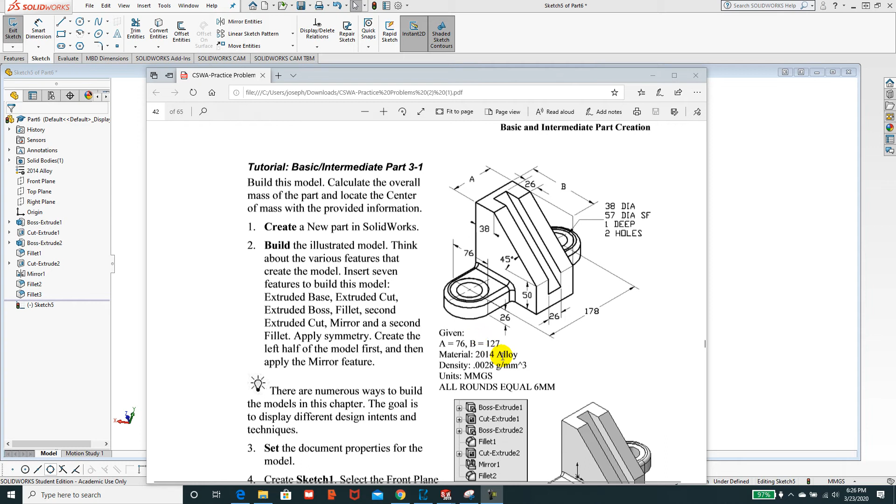If we take a look at it, we'll notice that it's a metric drawing in millimeters. The part is 178 millimeters by whatever this A and B value are. If we looked them up, 76 millimeters and 127. And essentially what they're going to make this out of is 2014, which is an aluminum alloy.

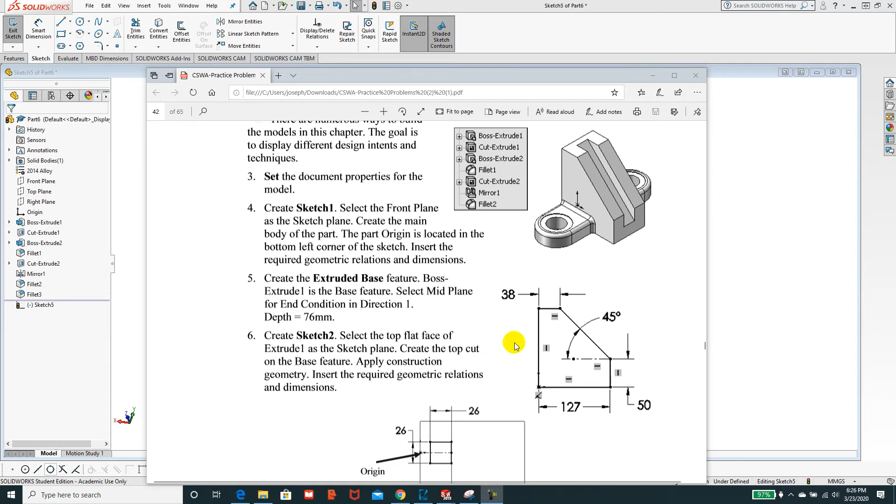When they lay out how to do this problem for us, they tell us that the origin is going to be right in the middle of the part in the back corner there. We can start off by drawing this geometry here on the right plane and then extruding this a distance of 76 millimeters.

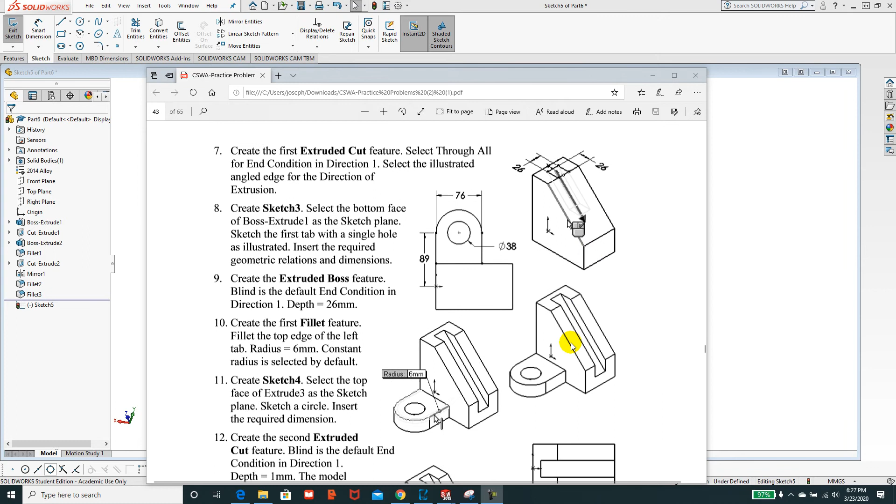After we've extruded that, we'll sketch on this top plane this little square, and then we'll extrude cut that. After that, we'll put these little dog ears on the bottom here with these geometries and with the fillets. So let's get started.

File, new, part. Plain white.

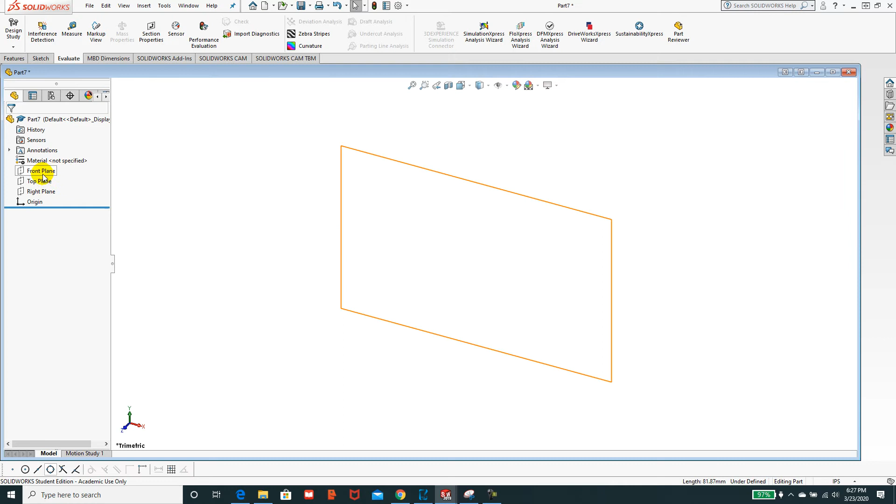Right plane, start sketch. And we're going to make that sketch just like that: 127, 50, 45, 38. They don't give us the height here because it kind of trigs it up there.

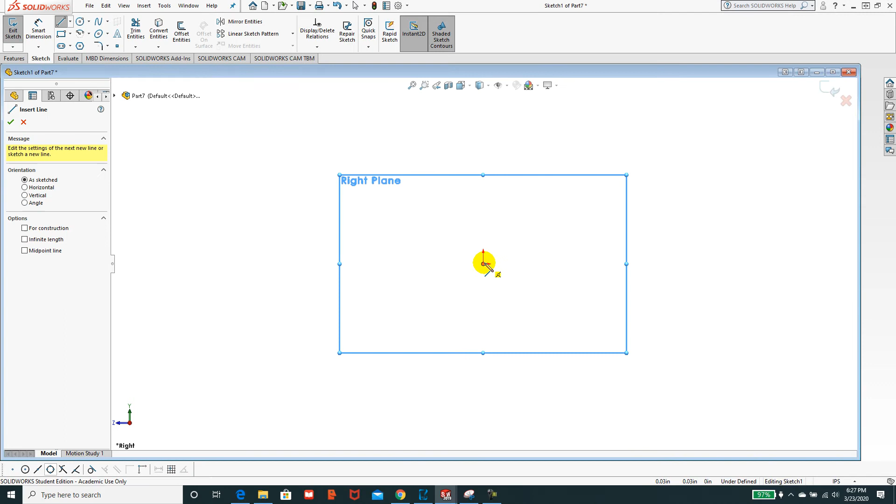So let's set the units, millimeters, and then we'll sketch on the right plane. There we go.

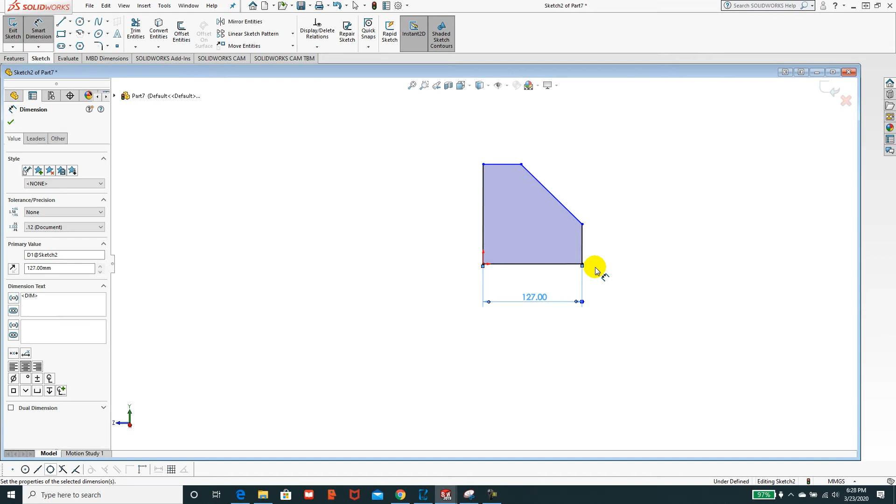127. 38. Get a construction line. Escape. Smart dimension. 45.

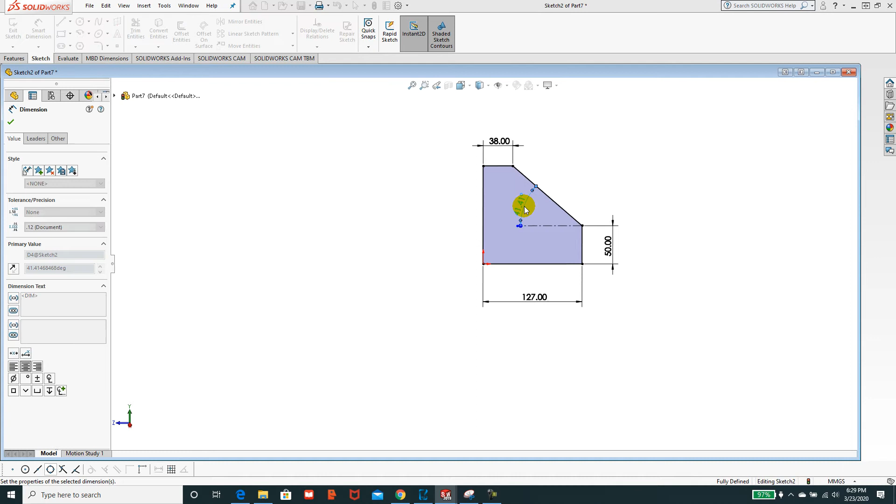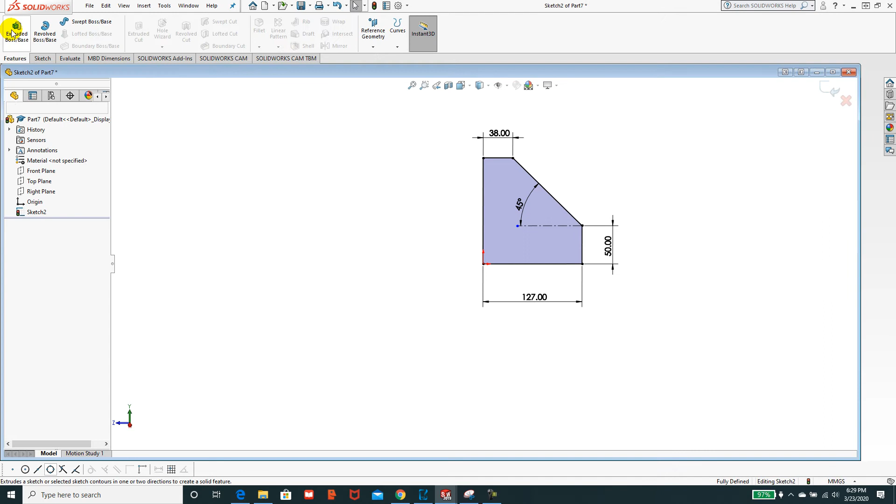Now we're going to take this and extrude it mid-plane, a distance of 76. Features, extrude boss base, mid-plane, 76. Green check mark.

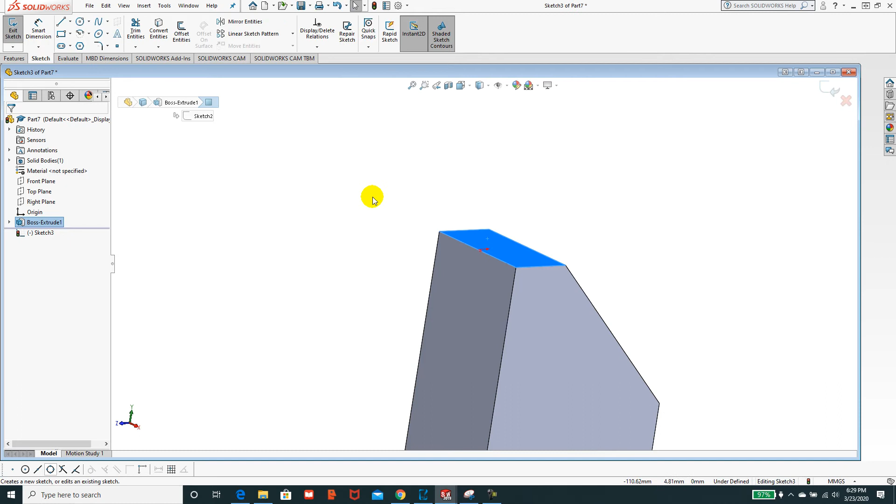I'm going to sketch on top of it here. Spacebar, normal to, sketch, center line. We're just going to make a square, and so we're going to go in here.

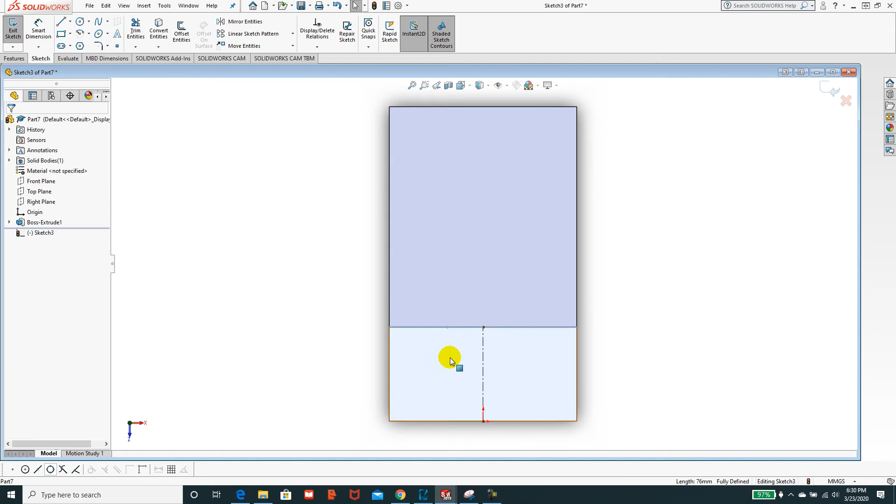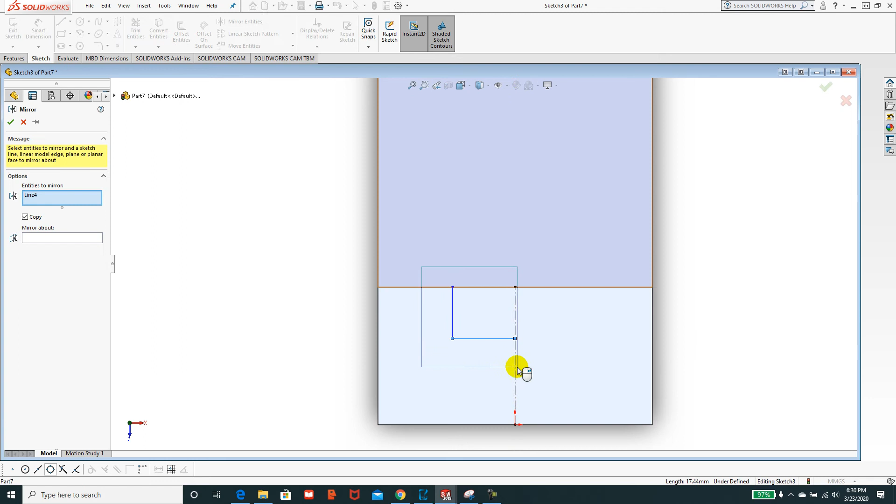We're going to mirror that. I'm going to close that off. And then we're going to dimension that: 26 millimeters by 26 millimeters. This is the sloping edge.

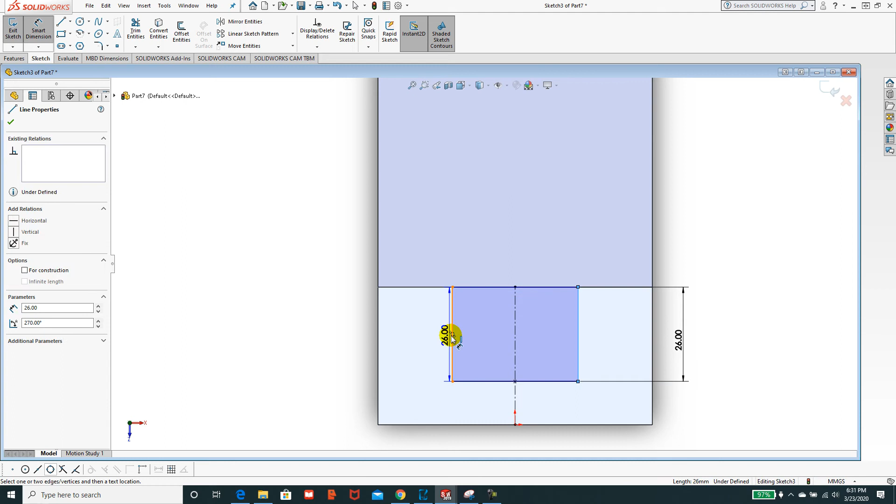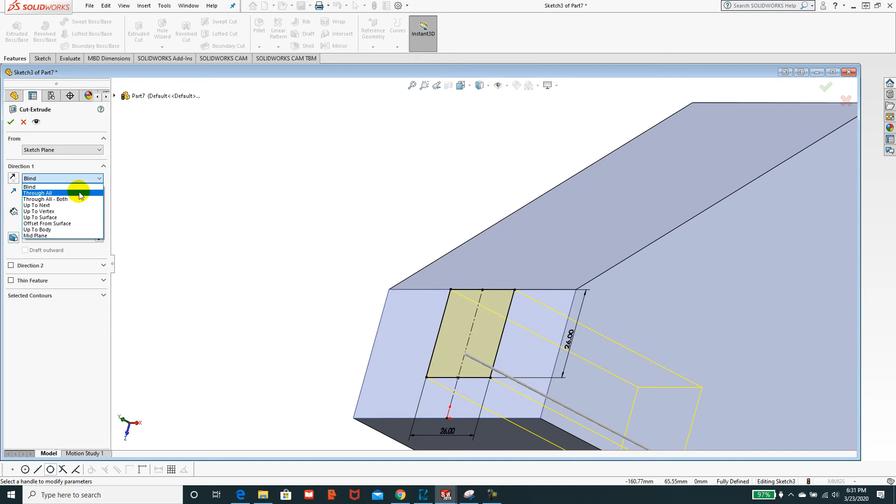Okay, now that we've created that sketch, we're going to go Features, Extrude Cut, and extrude cut that through all. We're going to click in this blue box. It's a direction vector. We'll take it just like that. Took the wrong one, let's try that again. The edge of it. There we go.

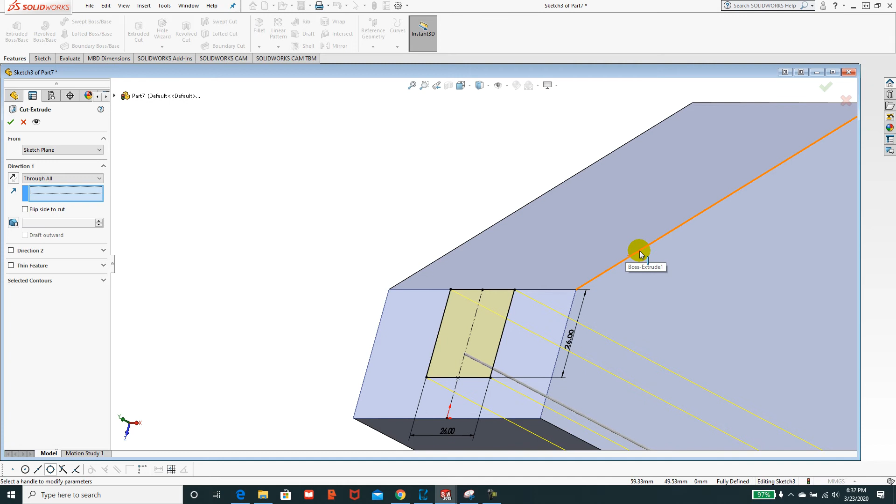Alright, so now we've got the major work done. Now we're going to go and do the ears, these kind of geometries like that, and it's going to be drawn on the bottom of the part. Select the bottom face and basically sketch this shape out, 76 by 89.

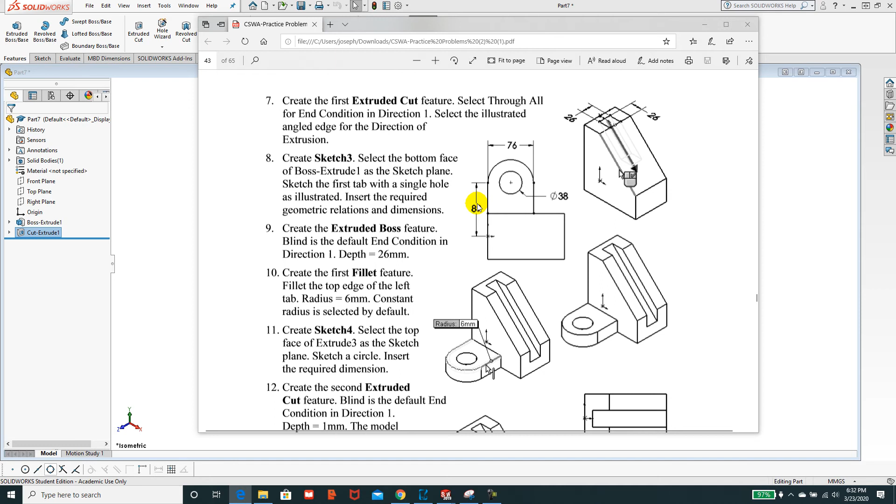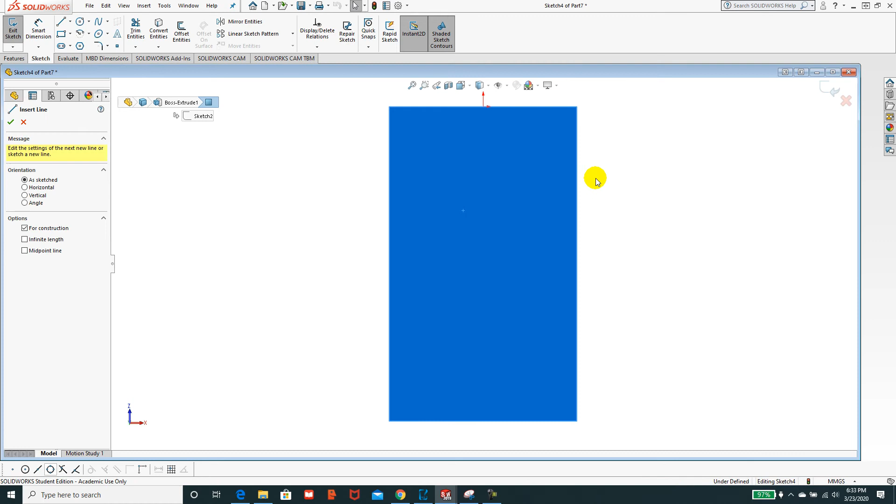Start sketch, spacebar, normal to, and then with the way this one is set up, I'm going to draw a center line. I'm just going to put it out here like this, and then make that half of 76, which would be 38 from this edge. That way I can kind of find the center of that arc.

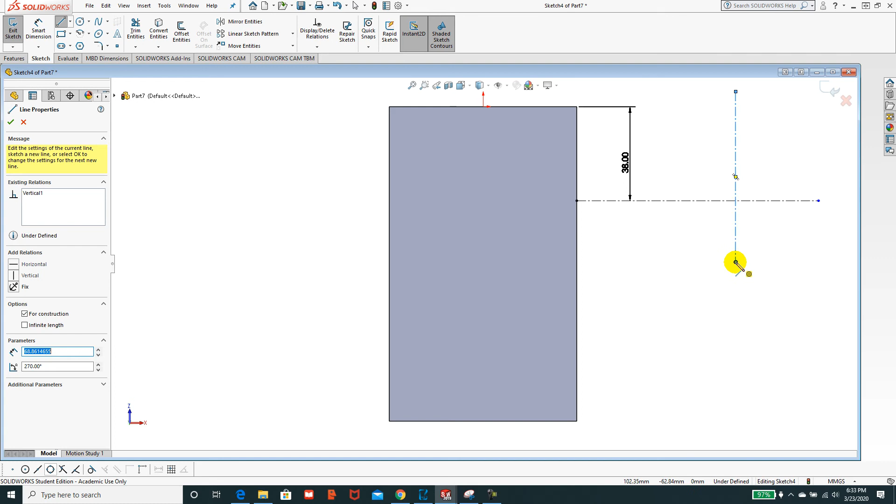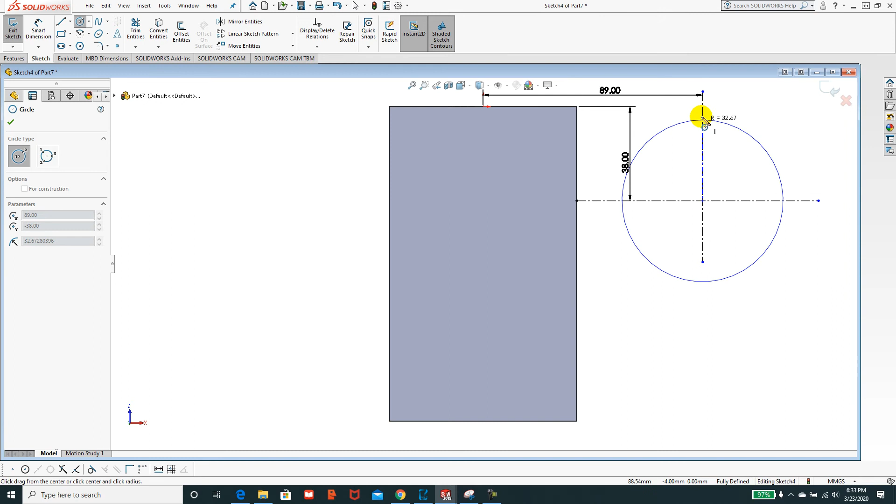And then the other one's going to be 89 for where that arc meets. So again, I'm just going to throw something out there, and then tie it to a dimension in the origin. This is going to be 89 millimeters. And then where these two points meet, I'm going to draw a circle.

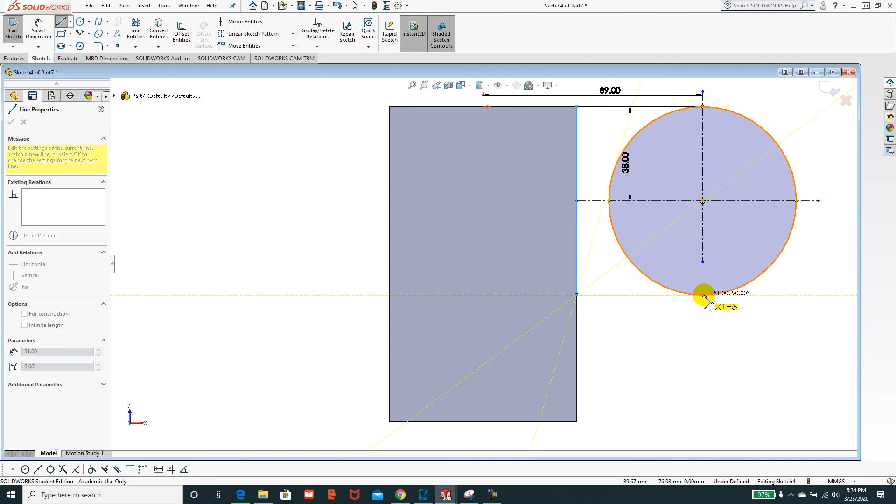That's going to go right to that quadrant. And then I'm going to draw from this quadrant to here. I'm going to tag this one, project it, grab it, escape, trim, slice through that, and then put a circle with a 38 millimeter dimension.

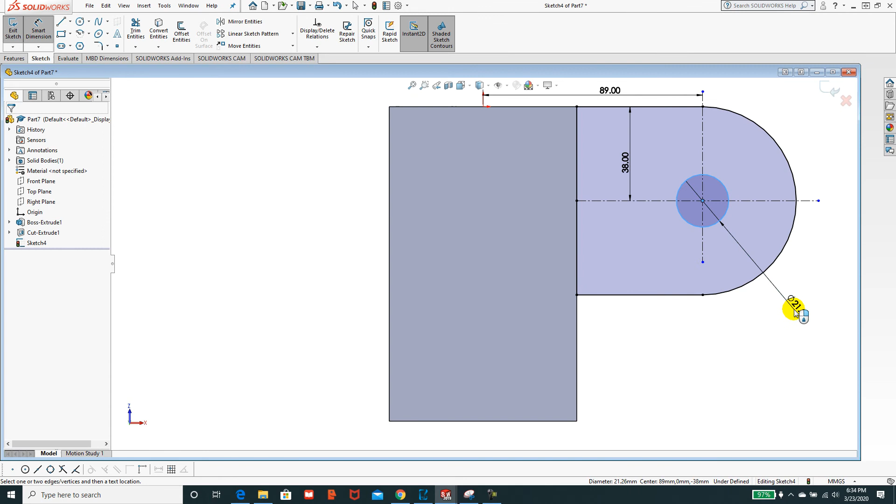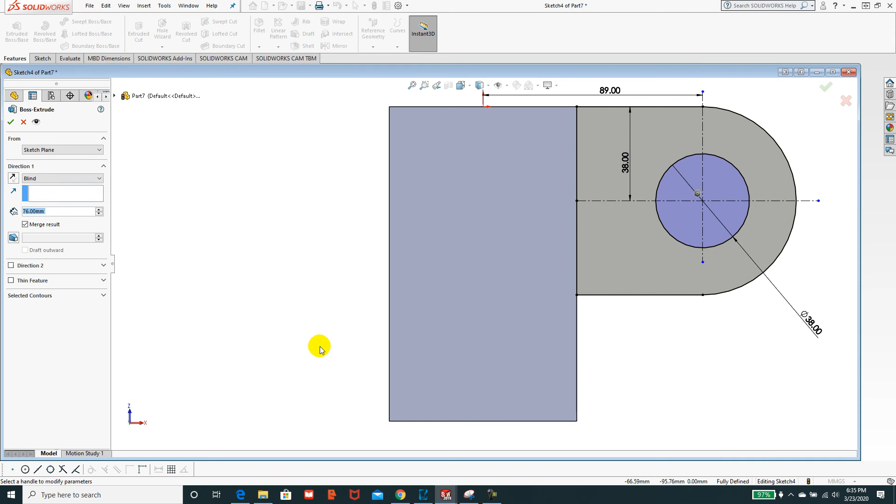Then we're going to extrude this a distance of 26 millimeters. Features, extrude boss base, other way, 26, green check mark.

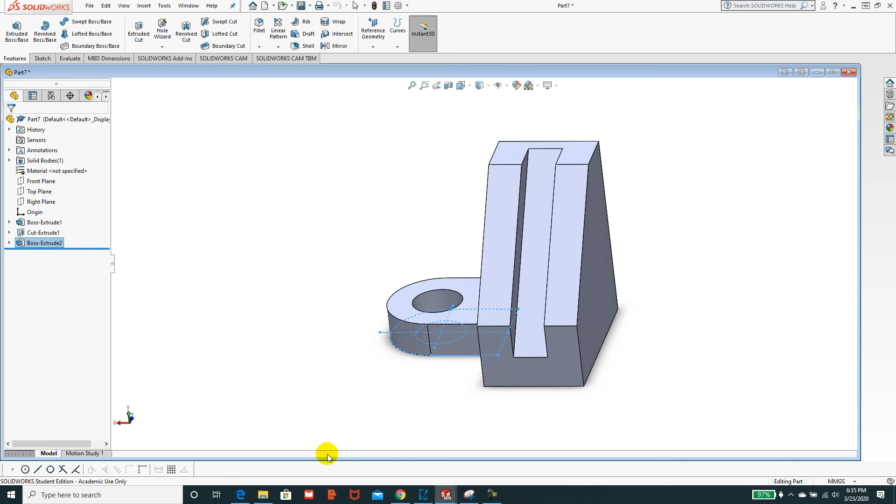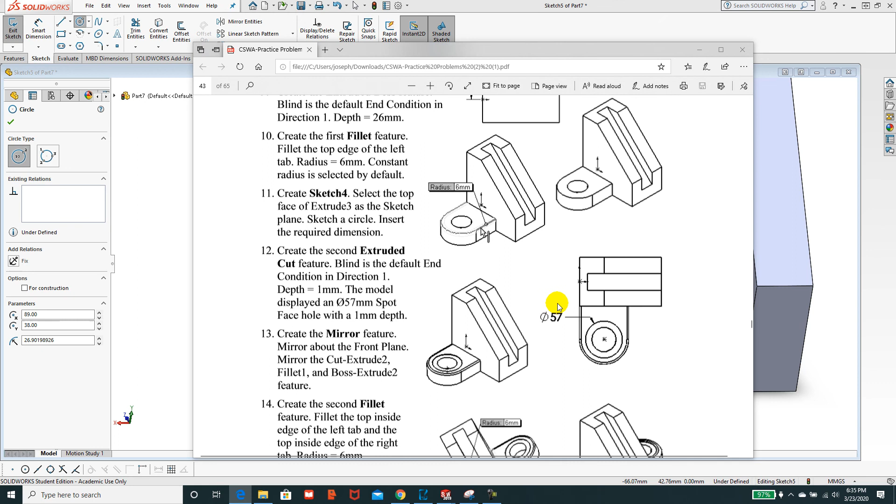Spacebar, isometric, turn that around a little bit, sketch on this surface. I'm going to do a counterbore. I believe it's 57 millimeters, and 1 millimeter deep.

Features, extrude cut, 1, green check mark.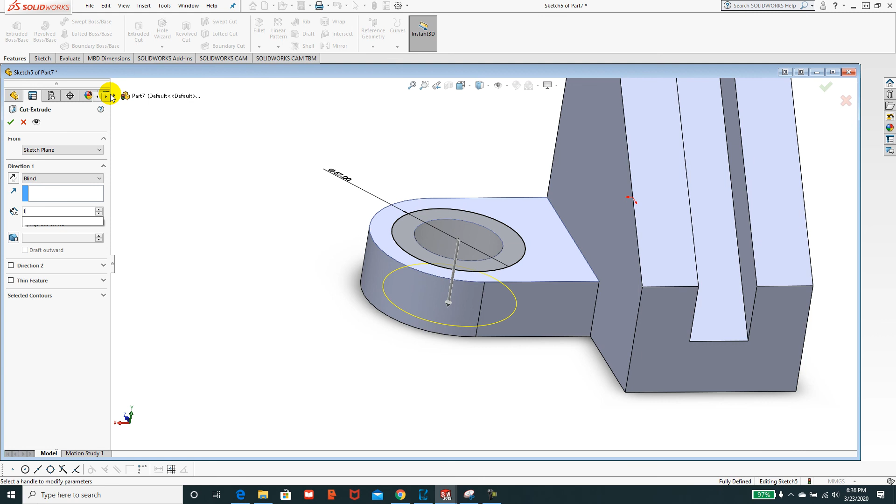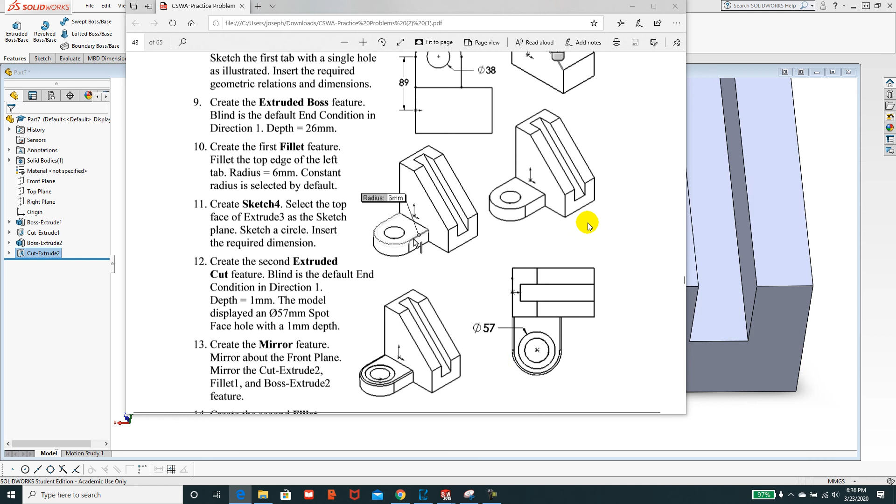Okay, now we're going to apply a fillet 6 millimeters along this edge. So if we take a look at it here, here it is, 6 millimeters. We're going to take that around that edge, and then we're going to mirror the part, and then put another 6 millimeters on that edge.

Fillet, 6 millimeters, right here, and we'll green check mark that.

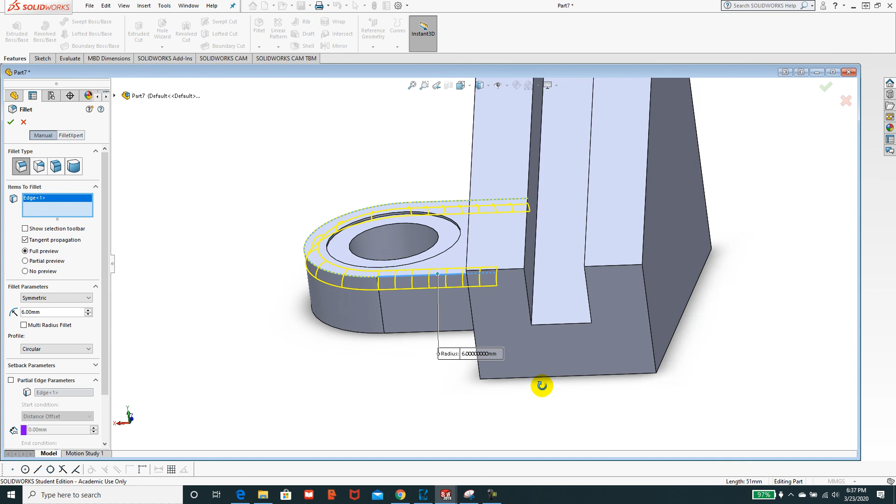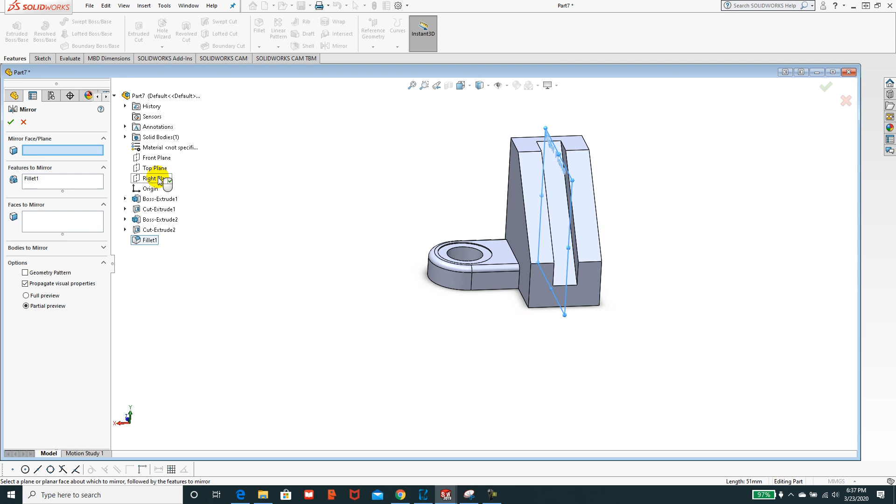Then we'll mirror this about a plane, the right plane, and we'll mirror all of this, holding control, this—not the cut, because that's going to give me the wrong result—so that'll do it.

And then we will go through and fillet one more time. We're going to get this, and we're going to do that on the other side too.

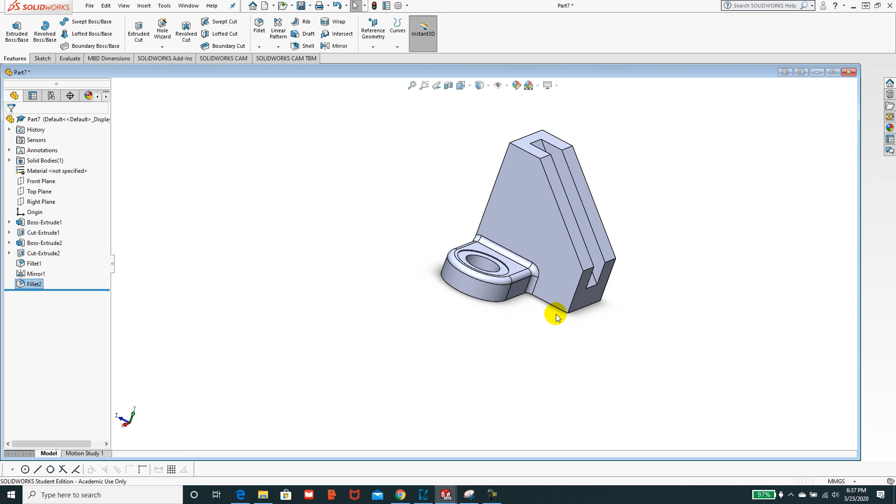We're going to assign our material to it. Material on it is aluminum 2014 alloy.

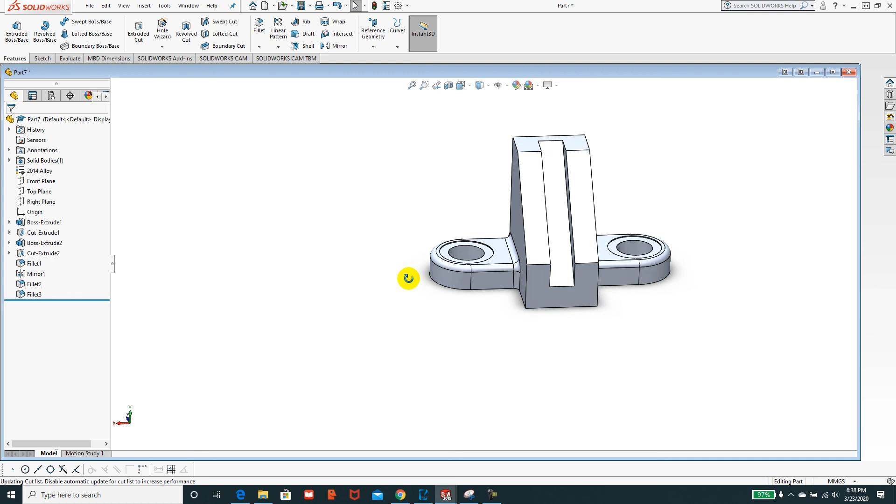And then we're going to go and evaluate mass properties. That's our number. And that looks good. So 34, 37, 29, 34, 37, 29.

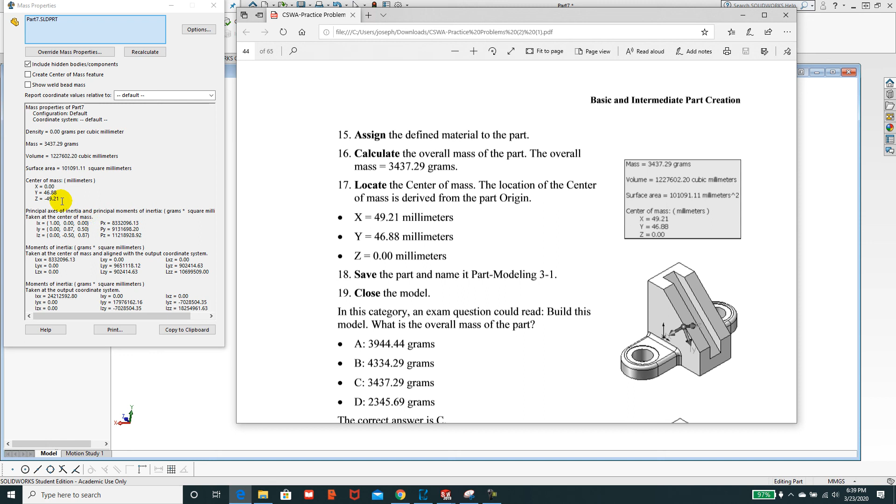Not sure why my center of mass is different. Got 2 out of 3. Probably flipped—yeah, my X and my Z. I thought it would look like it was backwards. Okay, so that completes this lab.